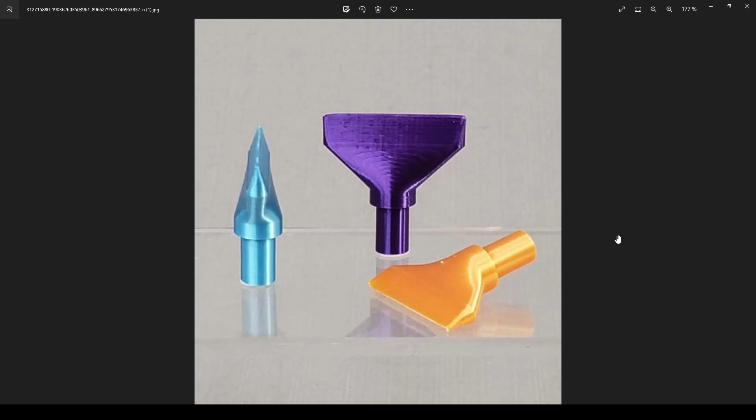This is from a question on Facebook. I really don't know what this is, but it has an interesting shape. We can do some interesting things with features in Fusion, so we'll have a look at that. This could be something you put a pipe in and we can scrape things, or this might be an air nozzle. I'll try to make both of them, though not with a totally smooth transition, but we can play around with this.

I'm going to show you the basic idea I have. I'll just do some markings so we can talk. Let's turn down the lines and switch colors, like orange.

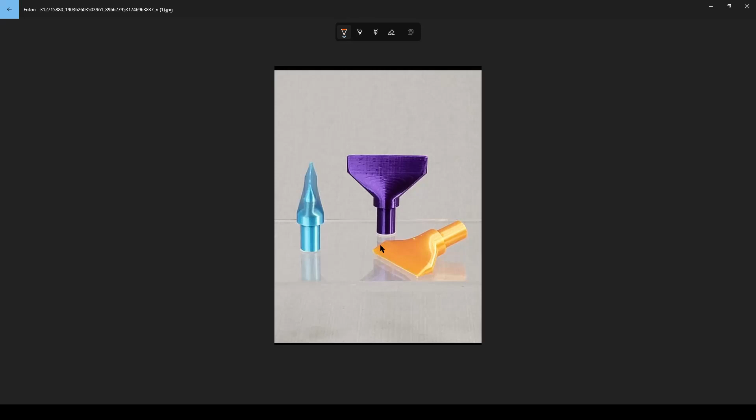Let's break down the geometry. The lower part here is quite simply two cylinders, nothing strange. We have a transition here over to a top part that in this direction looks square, but looking from the side, we can see it's like a triangle profile. So I'm going to use this triangle profile, use the two cylinders, and then make the transition. The transition is going to be a loft command.

So with that, let's pop over to Fusion. I've started by saving the file and I'm going to create a component. That's rule number one. I'll just call this thing, because I don't know what it is. We're just going to call it thing. The dimensions are totally random, I'm just going to take whatever I like.

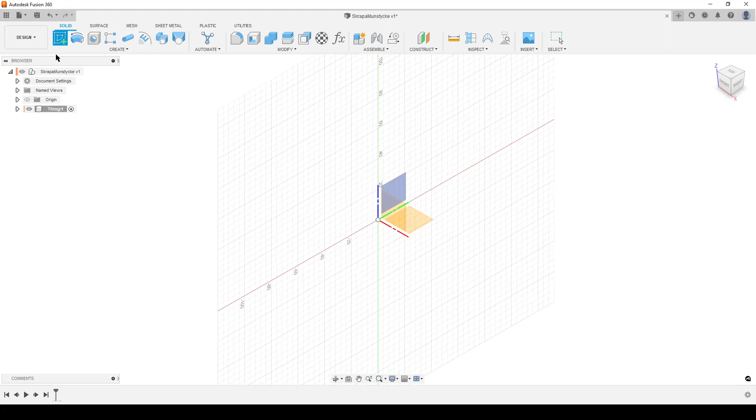Start sketch, create sketch, we'll do it from the top. We're going to make two circles, for the two cylinders. D for dimension: the inner one I'm going to do 12, and the outer one let's do 20. We're going to finish sketch.

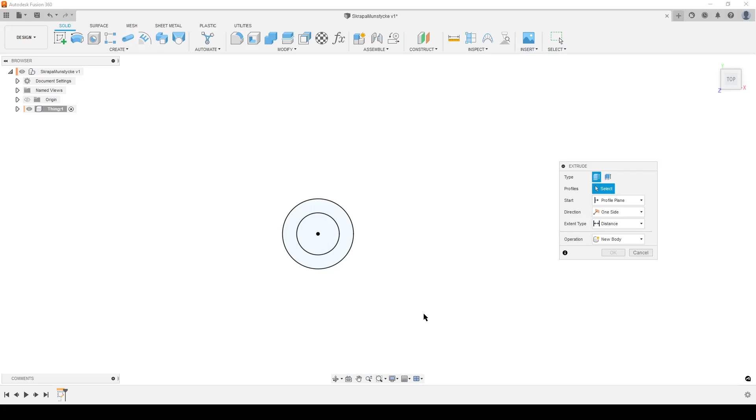Simply hit E on the keyboard for extrude. I'm going to rotate the view slightly and start with the inner one: minus 25. And once again, E, outer minus 5. I chose to do both downwards, which means if I turn on the origin, the point stays here, so I can use that in the next sketch.

Let's open up our component and hide that sketch. Let's look at the design once again. So I made the two cylinders. Now let's make the top part, the triangle.

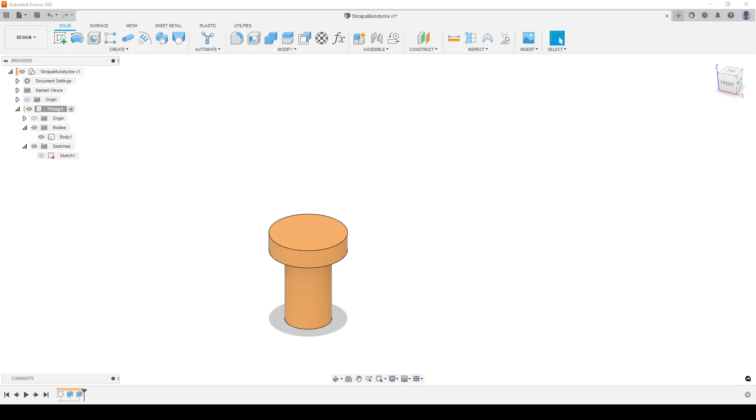So I'm going to create a sketch. I like to view the part from the front, so I'll rotate it to the side and make the sketch from the right side, or we could do the left side. We're going to do some lines, starting with a line from the midpoint straight up. We'll use that to align things later. Some more lines, we're going to do a little triangle, something like that.

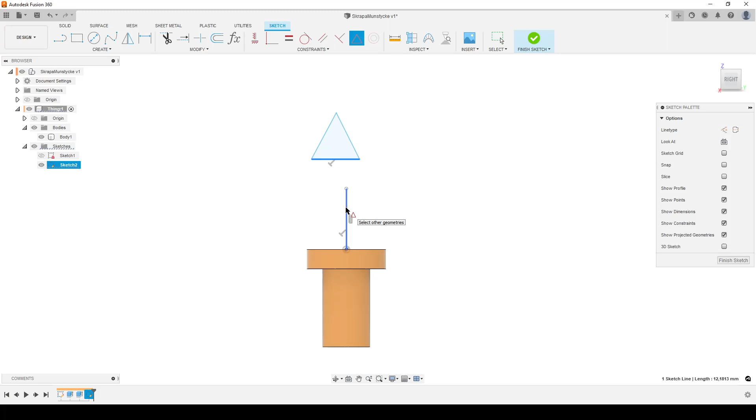I got a perpendicular to that, or we could get a horizontal constraint, it doesn't matter that much. Escape to stop the line command. Midpoint between this line and the point - do not select the line, we want the point. We'll tell Fusion, okay, stop that.

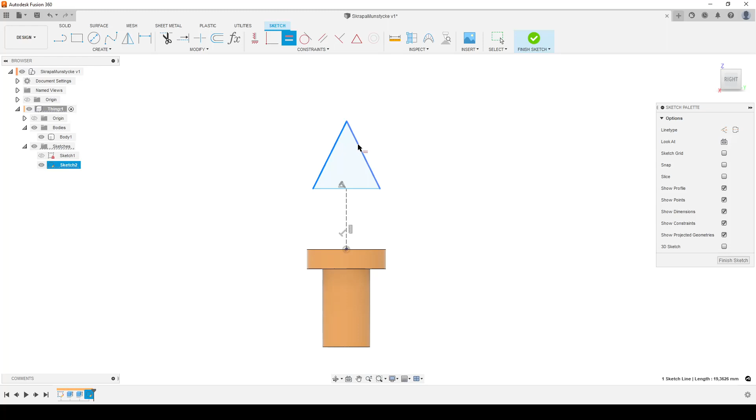This line here, I'm going to mark and turn into construction, to make visibility a bit easier. Of course, the problem is that we can move this triangle, the legs are not equal. You can use a horizontal constraint to lock the top in, or we can simply look to do equal between the two legs of the triangle. D for dimension.

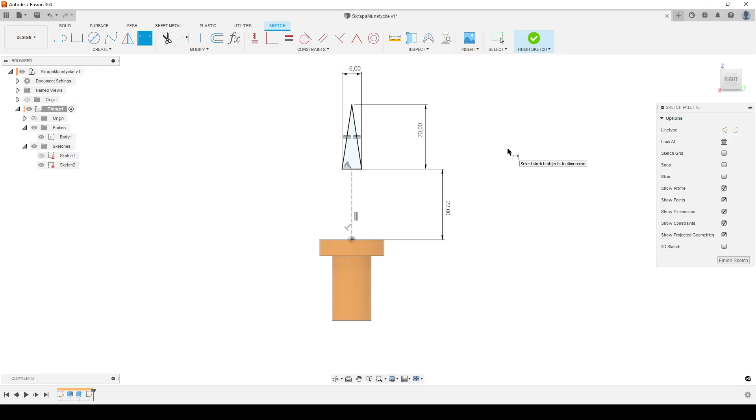This is going to be the distance of the loft, so just do 22. We're going to do the width of this nozzle, do it 6 millimeters. And the height of this spiky part, let's do it 20. So I have made my triangle sketch.

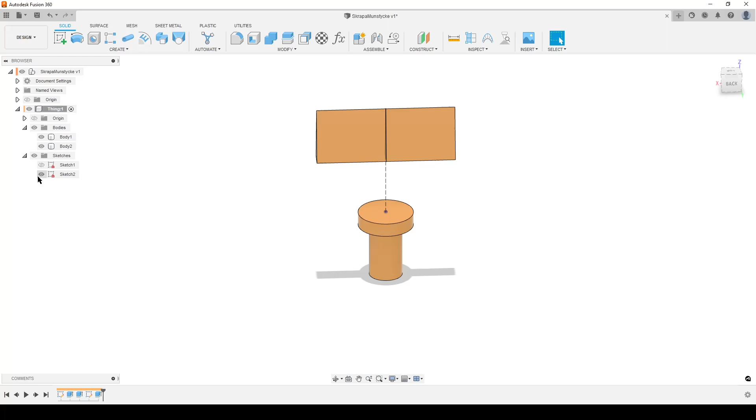I'm going to finish sketch, and once again E on the keyboard for extrude. But I'm going to change this to symmetric, whole length, and I think it'll be something like 40. Is that wide enough? No, let's do it 50. So 50, like that. Hit OK, hide that sketch. So we have our triangle shape.

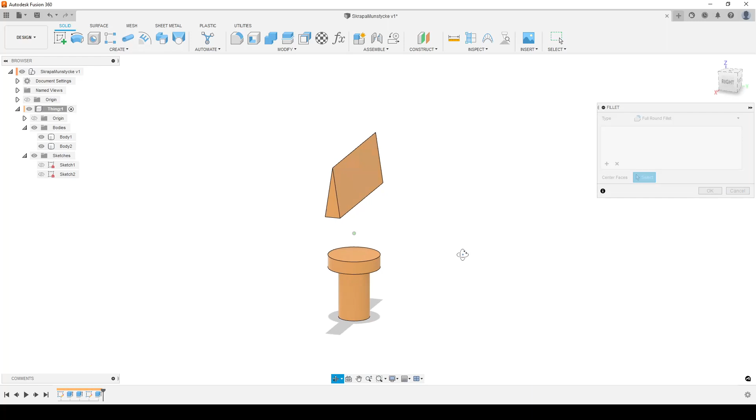I don't know how they've done this, but there's an interesting thing you can do in Fusion: you can use fillets around the things. Change the type to full round fillet and select, asking for the center face. The center face is, of course, the triangle face, and in this case it was nice enough to pick the correct side.

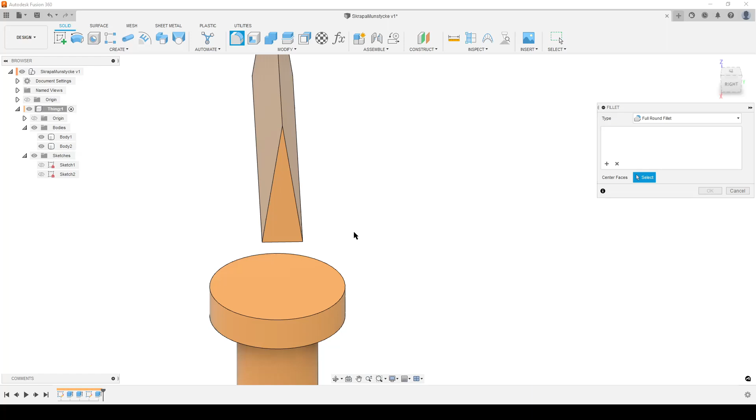Sometimes it doesn't do well. Let's see if I can fail. If I do it like this... oh, well, you're nice - oh, I've got to click down here. Sometimes, no, you're too nice. Can you please fail? I like when Fusion fails like that. You can see, okay, I made a fillet, but it's the wrong faces.

I want to show you this. So you can do side one. You cannot select any side right now. You have to hold down Control and then select this face. Side 2, hold down Control. You don't need it for the second face, you can simply click it. In that way, I've created this fillet.

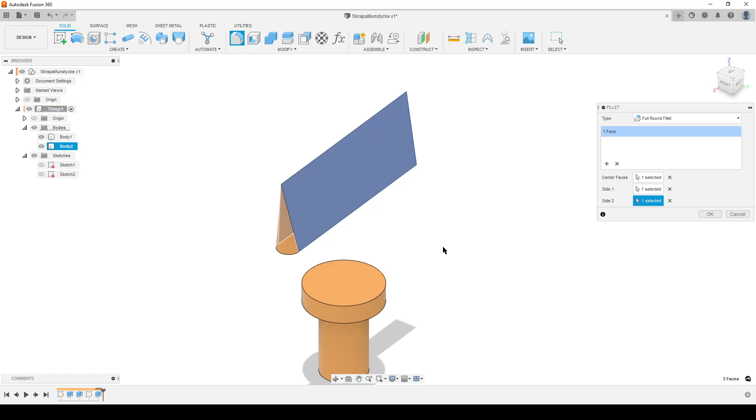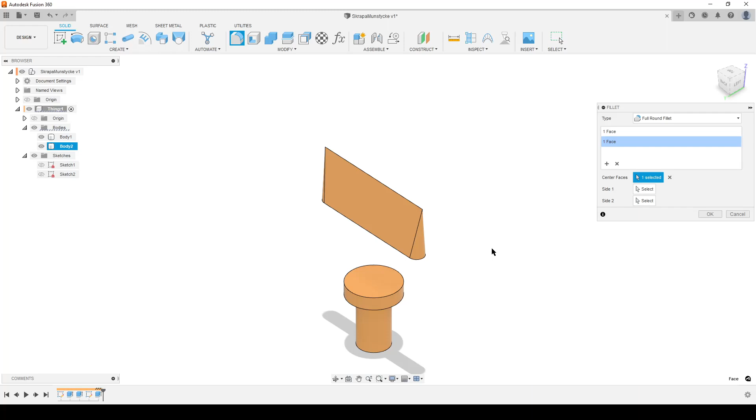And the nice thing, if we look straight at the side, it goes straight down and rounds off like that. And I'm going to do plus, add a selection. I'm also going to do this one here. So let's see if I can be lazy and simply click the face like that. If a problem, add the sides as you want. If it does it correctly, happy times. Click OK. And we made around the corners.

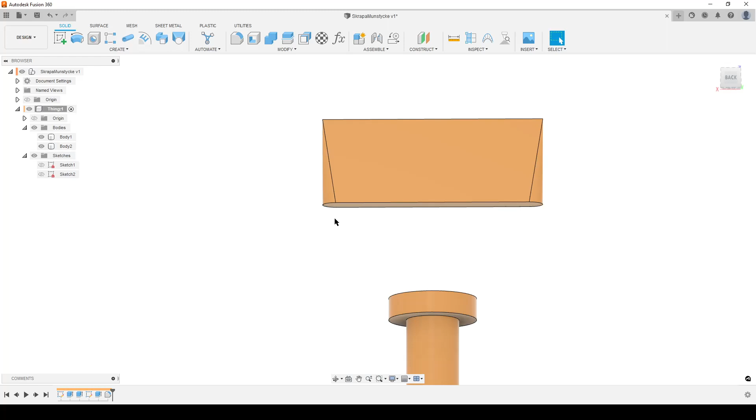And the interesting thing about these is that these are angled cones. You can think of this as a cone, but because it's tangent to these two edges, and it's aligned with this edge out here, or the other edge over here. So it's a slightly tilted cone that's cut off at the bottom. And the fun and good thing about this is it's not a circle anymore. I think it's some type of hyperbolic curve. It's not an ellipse. Doesn't matter. But it makes the loft a bit easier to create. It's just a good thing.

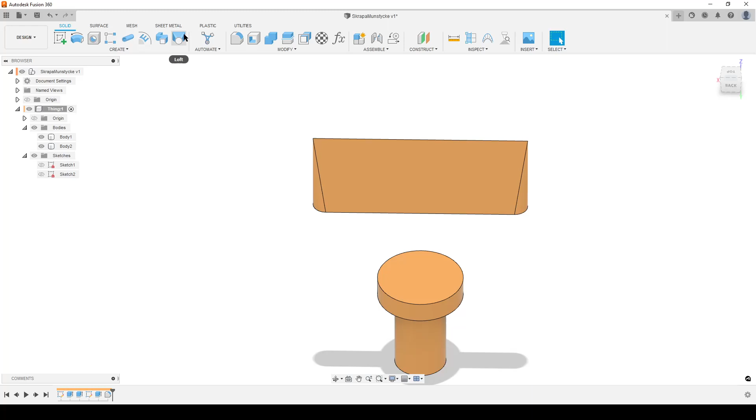Create the loft. I'm gonna select this face here, and I'm gonna select the bottom face up here. Gonna be join, but moving around, you can see Fusion creates this line here, and it's a bit in an awkward place, which we can see. I'm just gonna right click. I'm going to turn on orthographic view. So if I click on the left view and look at things, you can slightly see that things are tilted.

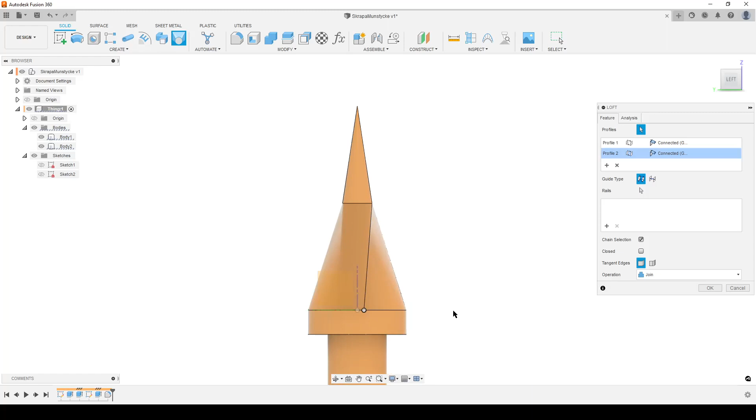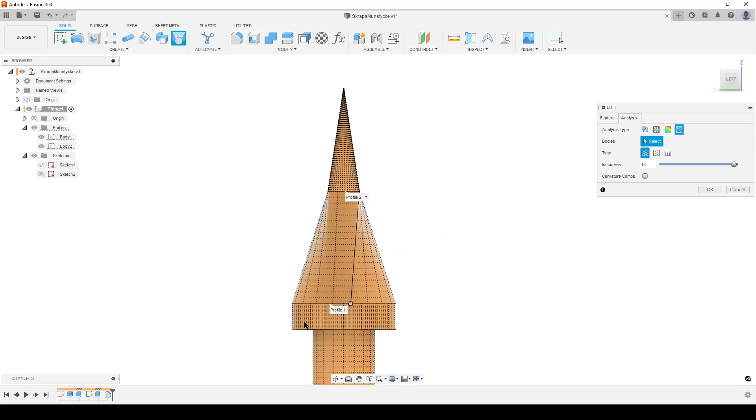We just turn on analyze isocurves and pop those up into oblivious amounts of them, like that. We don't need the curvature combs. And look straight from the front. You can see the curves here, especially the one in the middle, is angled to the side. This one should be basically straight up. If we move to the left, we can see that the loft is slightly twisted, and I don't want that. The loft can be basically correct, but I want to help Fusion to get things in the right place. So we're going to turn around, go back to the feature.

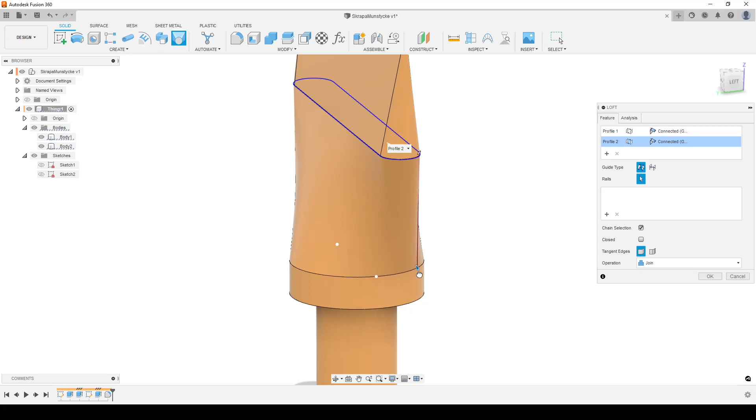Let's see if it still updates. No, it drops it. So I'm going to start by dragging this. You can see the two white points that popped up. And we move this line. You can see the loft changes its shape as I move it around. So I move this guideline over to here. And then, of course, I take the guideline up here and do the same thing. I move it around. You can see I have a nice point out there.

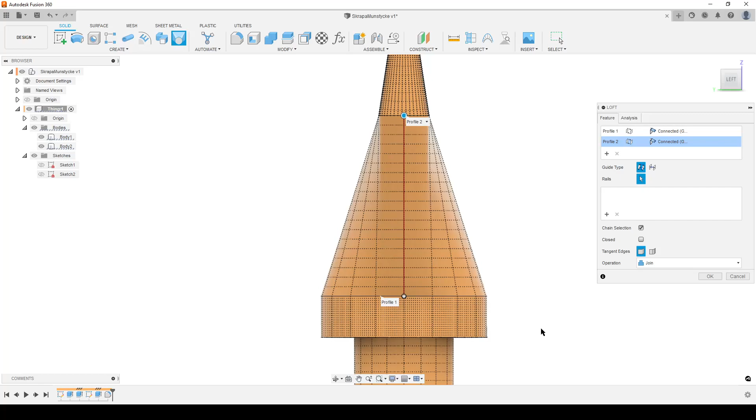And if I drop it now and look from the left, you can see the isocurves here are now aligned. The parts look symmetric. And if I look from the front, I don't have an isocurve exactly in the middle. Let's see if we can pop in some more. Yep, you can see the isocurve in the middle goes straight up. It's like a feather. They're spreading out. So I'm going to hit OK. And I now have basically what I want.

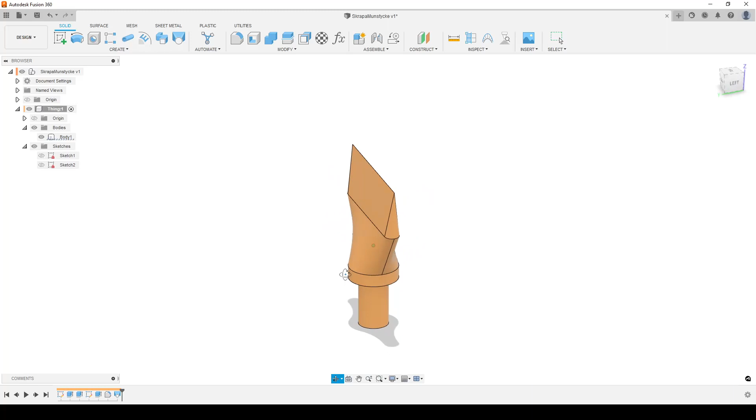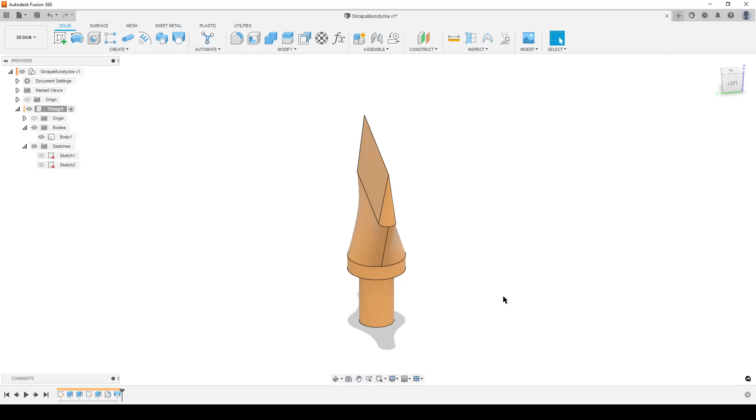This is if you want to make a scraper. Yes, we can do the loft with some different connections. You can use tangent and curvature connections. But if we want to turn this into a nozzle, I want to use the shell command. And if you start doing a lot of tangents, it sometimes fails. But anyway, we're going to turn this now from a solid into an air nozzle. We're going to blow in air here, and it's going to come out of this long slit here.

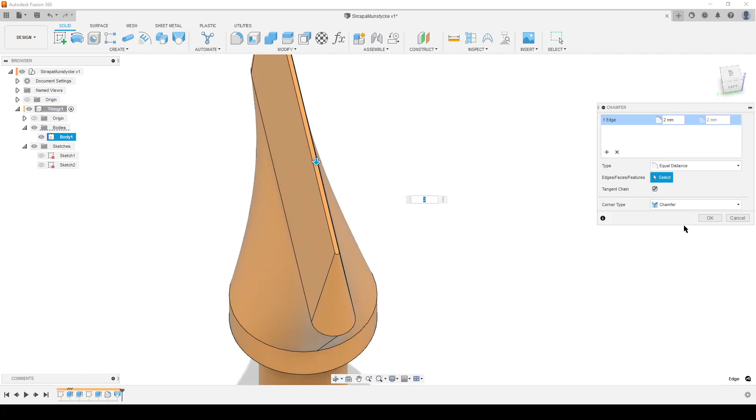So I need to somehow flatten the face here. We can do that with a chamfer. Select this. Let's do 2 millimeters. That looks nice. So I've got myself a flat face up here. I'm going to hit OK. Going to do the shell command. Select this top face here. Turn the part around. Select the bottom face and the most normal wall thickness is 0.4. And let's see, it doesn't open up the face here. I'm going to click OK.

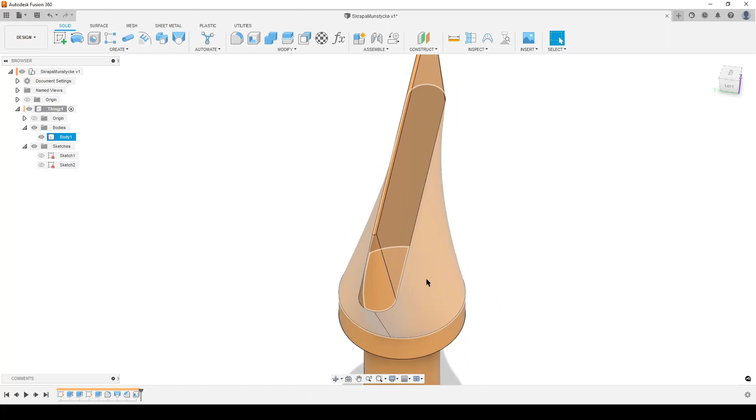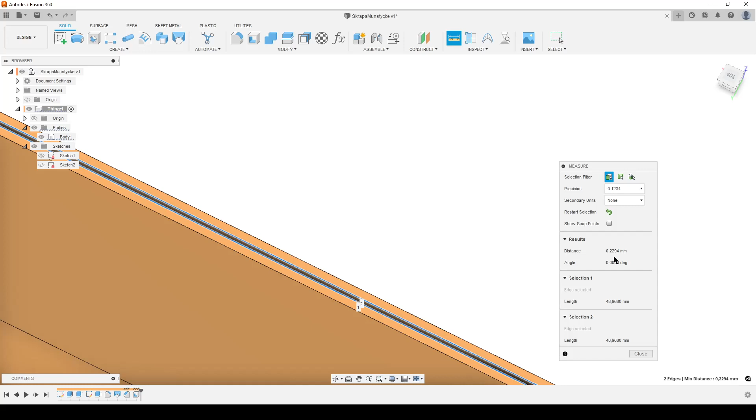So what I need to do, go back to the chamfer and make that 3 millimeters. And now you can see I have a very small opening. So by editing the chamfer to 3.5, I can change how much this opening is. Of course, I can use measure to see the distance from here to here. It's now 0.22 millimeters. And by doing that, I can make myself a little small air blower. And you can also go and offset faces to make things thicker and all of that.

So I hope you have found some interesting things in this workflow that you can use.